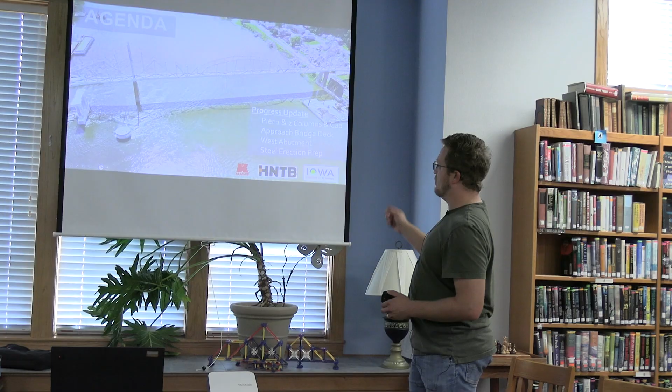Thanks, Derva. Got another great crowd here tonight, lots of familiar faces. If you're not familiar with me, I am Clayton Burke, the Iowa DOT project manager for the bridge replacement project here in Lansing. Once a month we get together and do these bridge talks, so I'm going to give you a little update on some of the construction that's been happening on the new bridge. We've been working on Pier 1 and 2, the approach bridge deck, the west abutment, and we're also getting ready to start setting steel for the new truss, which is a very exciting milestone for us.

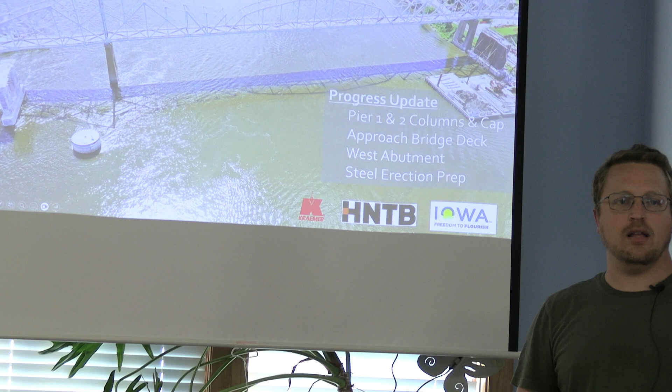And then we've got a special surprise afterwards. Is that all set up, Travis? We'll have a special surprise later. Is that all? I don't see it. I don't see it either. Maybe. Otherwise, Travis has something really cool to show you up on the wall.

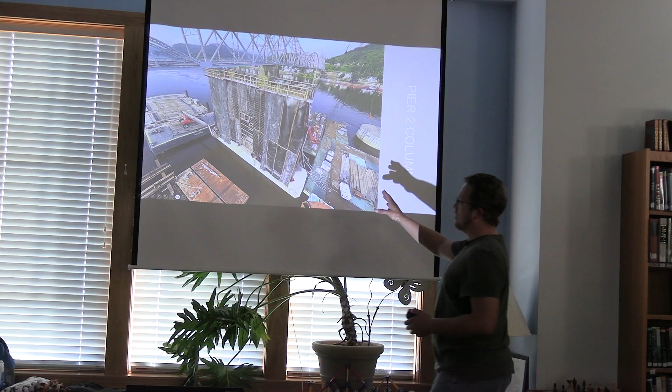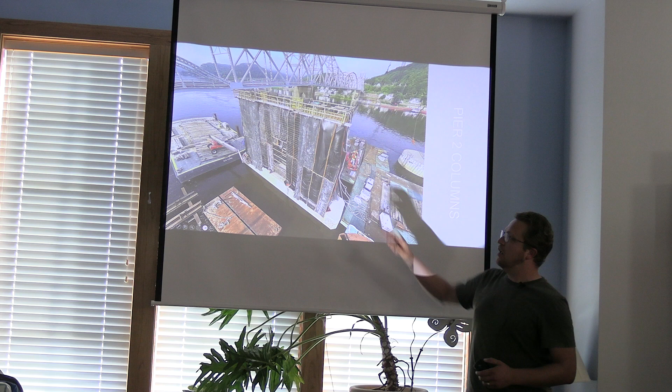Diving into it, we've been working on Pier 2 out in the middle of the river for quite a while now, and I believe the last time we talked we had poured the lower portion of the pier columns, what we call the saddle. Now we've been working on the middle of the columns and the cap of the pier. Here you can see all of the formwork, the thermal blankets that cover the formwork, and the cooling tubes, because this is mass concrete, so we care a lot about the temperature inside the concrete compared to the outside. We don't want the inside to get too much hotter than the outside, and that's why we pump cool water through the concrete on the inside to cool that core, and then we put thermal blankets on the outside to heat up the outside. That's all to keep the concrete the same temperature as it cures, which prevents cracking primarily.

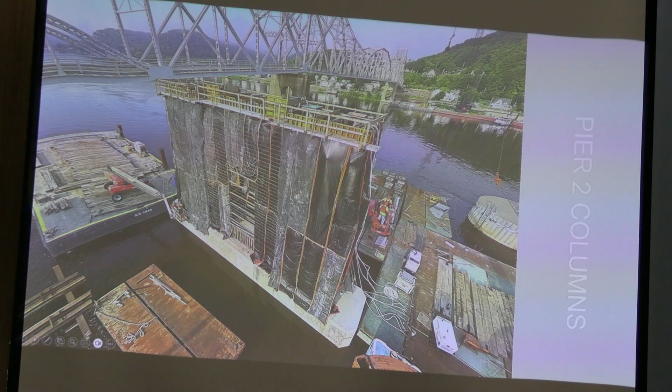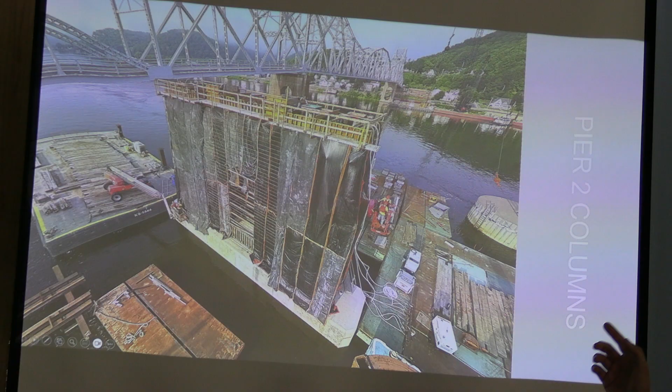So we've got the blankets, the cooling tubes, and then eventually the contractor pours the pier. They pour the concrete in there, I believe it was around 530 cubic yards of concrete. To get it out to the middle of the river, they have to use 2 concrete pumps, which is pretty unusual. They dump the concrete into one pump, that pump pushes it all the way through the hose into another pump, and then that one finally pushes it out into the middle of the river.

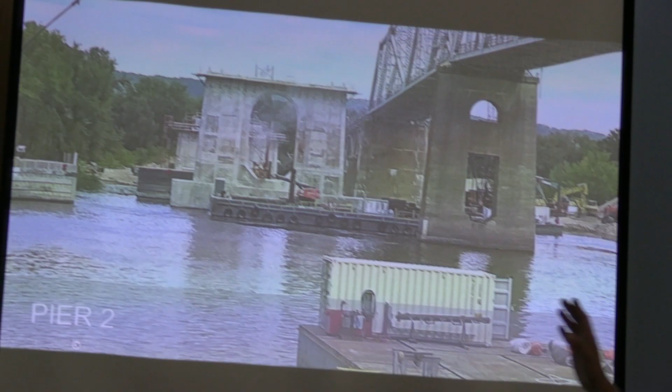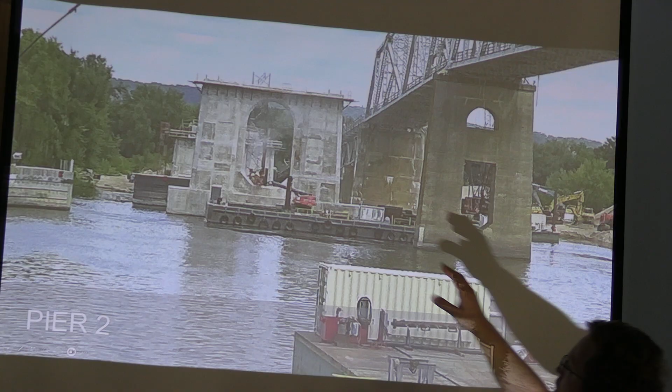And then they take all the forms off after it cures, once the temperature has gotten close enough to the outside temperature that we're not concerned with cracking. This is what it looks like - this is now the completed Pier 2 out in the middle of the river. You can see the patchwork from the forms, which will age with time, and we may clean some of that up to get a more uniform look. But this is ultimately what it looks like for those large concrete structures - after you take those metal forms off, you have a nice finished product like this.

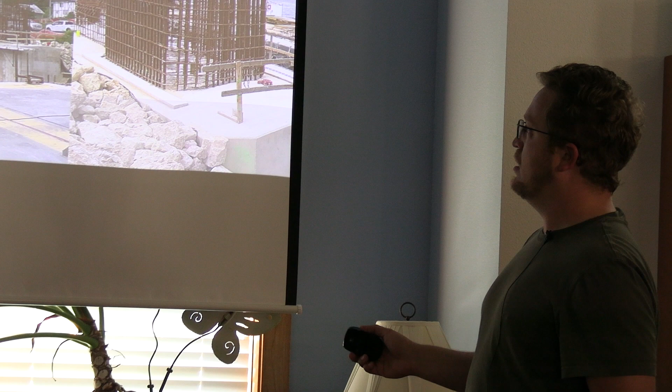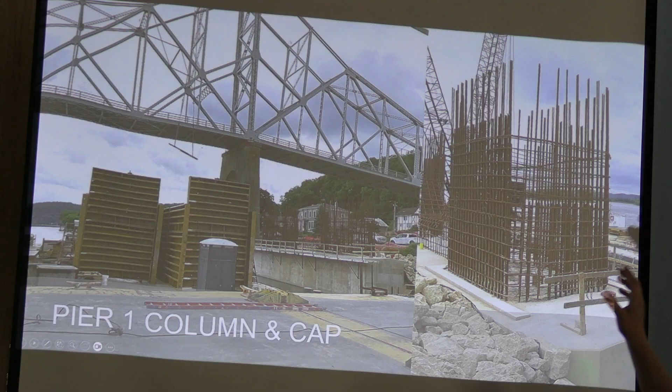And then on Pier 1, we are working on essentially an identical pier, using the same formwork. After they finished taking the forms off of Pier 2, they were able to start using those forms on Pier 1. To start with, you have the rebar that reinforces the concrete, the columns, the saddle, the cap. This rebar is protruding out of the footing, so it looks like it connects to the concrete. It's actually sticking down into that footing, creating a strong bond between the footing and the columns of that pier, and then it swoops off down into the saddle, making that nice open window in the middle of the pier.

Then the contractor will bring in those steel forms again and set them up around the rebar. So after we finished the saddle and the lower columns, we again put the steel forms up for the column and the pier cap. This is Pier 1 right on the Iowa bank. It's very tall and very close to Front Street.

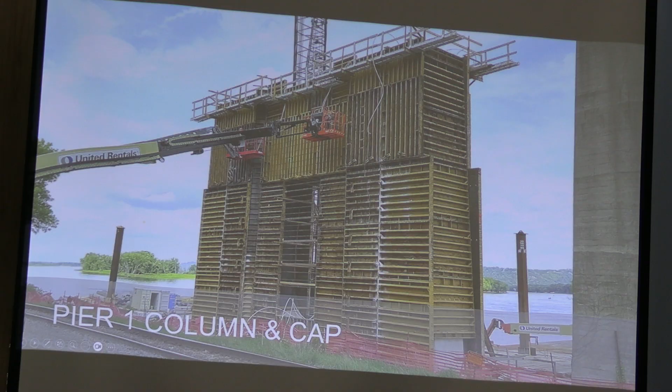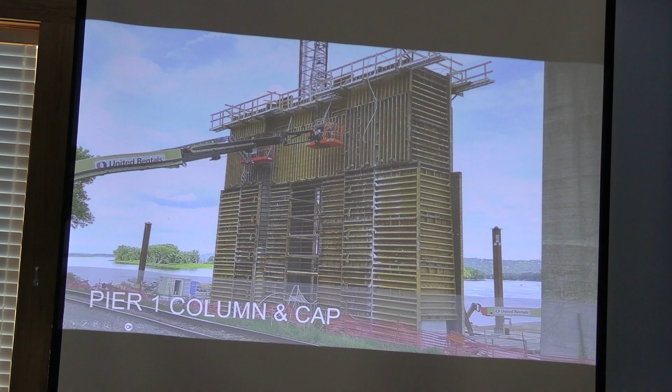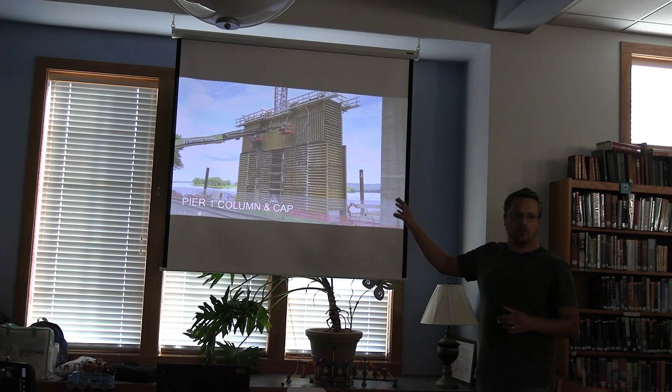You're also working over the railroad here, so everything has to be done with lifts extending over the roadway. It adds an extra layer of challenge to the process because you have to move if a train's coming. So they constantly have to get up there, get some work done, move out of the way for a train, get back, get some work done. There is a railroad employee called a railroad flagger that works with us on site, and that flagger keeps track of all the trains and all of the employees and people working in the work zone, alerting everybody when a train is coming. They get about a 15-minute warning, and they've got to get out of the way and be ready for that train to come through.

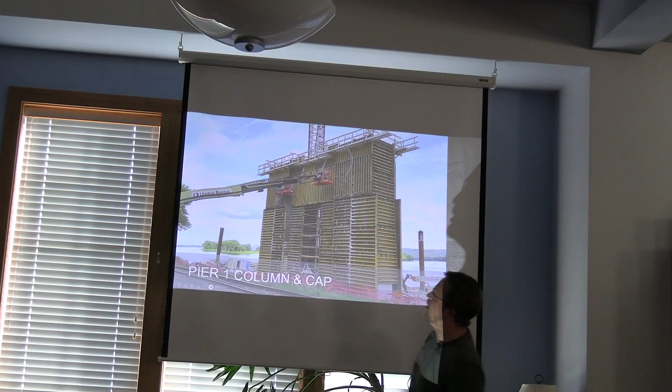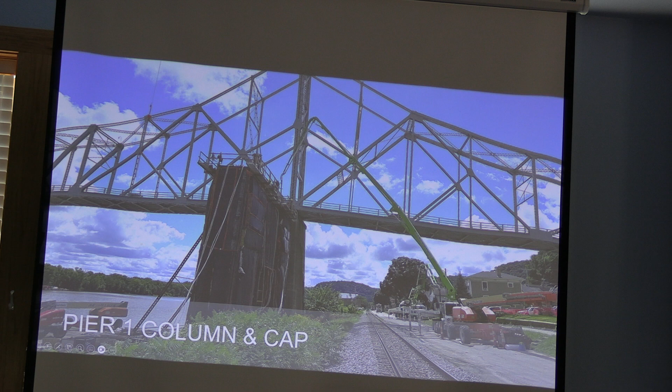Here again, it's mass concrete because it's very thick, wide, and tall. There's the cooling tubes getting ready, and then we're going to pour this with another set of 2 pump trucks. This time it's not out on the water a long distance, but we have to pump the concrete underneath the bridge and then up over into the pier forms. Again, the train element complicates it. This was another 530 cubic yard pour, which takes most of the day, so naturally you'll have several trains come through while you're pouring concrete. You just have to stop, swing out of the way, wait for the train to come through, and then go back to what you were doing.

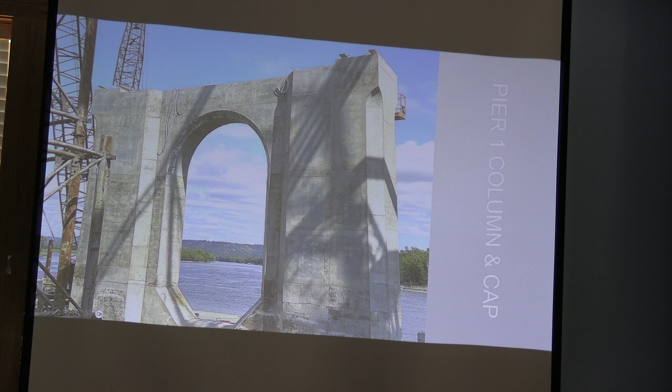After it cures and the temperature is all good, this is what it looks like with the forms taken off. So now we've got the west abutment complete, Pier 1 complete, Pier 2, and the remaining piers on the Wisconsin side. It's kind of a big milestone to have all the substructure concrete poured. We're very excited about that and getting to move on to the structural steel.

Last time we were starting to touch on the Wisconsin bridge approach and the concrete deck we poured on it. If you've driven over the bridge recently, you can see that nice big deck spanning along the side of the existing bridge. This is providing a 40-foot wide roadway between the barriers, compared to the 21-foot wide roadway on the existing bridge. So the new roadway will be much wider, with full 12-foot lanes and 8-foot shoulders on each side - quite a bit more space for users, commercial vehicles, and everybody to get through that bridge.

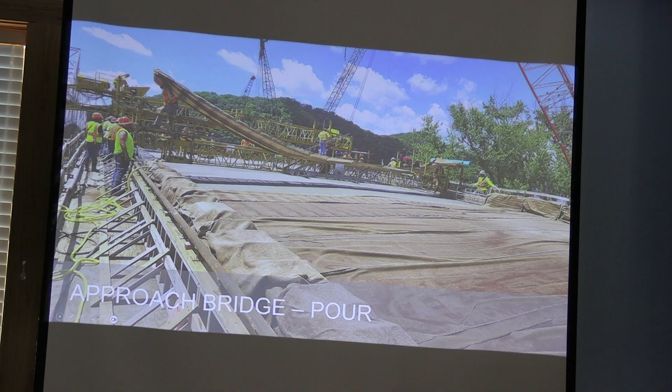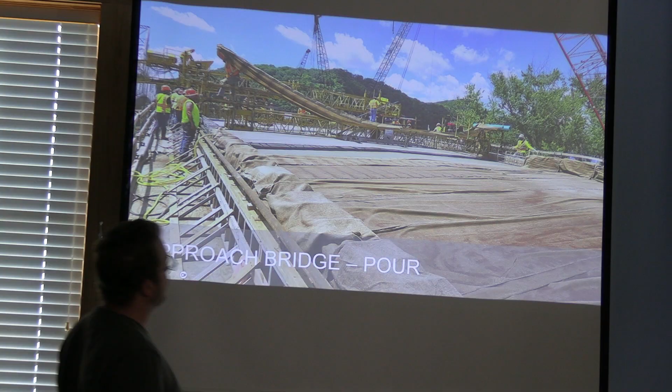Here's an interesting point. All of these yellow trusses, or this yellow steel frame you see, that's all part of the paver, what we call the paver, or the brand name is a Bidwell, and a lot of people like to call it by that brand name. This Bidwell has a track on it, and then a device underneath that track that goes back and forth, and that track follows the crown of the roadway.

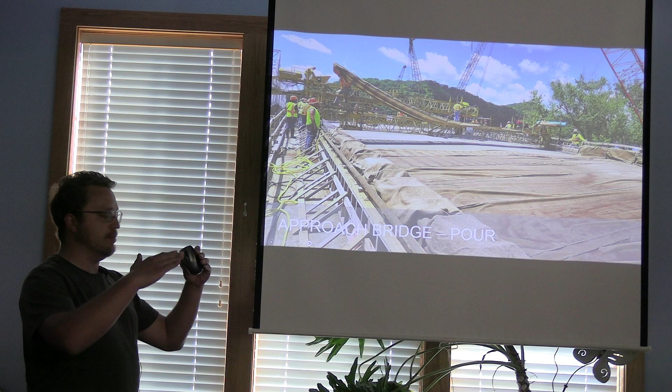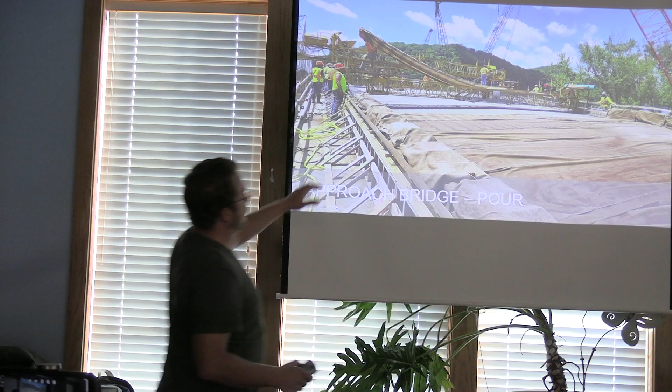The roadway isn't perfectly flat - we have what we call a crown in it, with slope on each side of the middle of the road, which lets water drain away from the center. So this paver is actually set up with that crown in the middle, and it goes back and forth. You have people working in front of it who move the concrete into the right place and shovel it so the augers spread the concrete out just right. Behind it, you get a nice smooth surface, but we don't want it too smooth - we want a surface that's a little rough for friction so your car tire grips it well. And that's why you'll have...

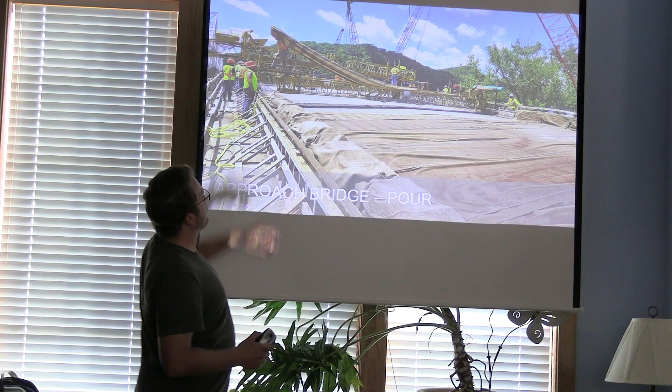I don't think you can see it in this picture, but you'll have somebody with just what we call a broom, which is just a broom, and you run it across and pull it back, and it creates that nice texture on the surface of the concrete so that your cars will have a nice grip and you won't be slipping around on a wet, slippery bridge.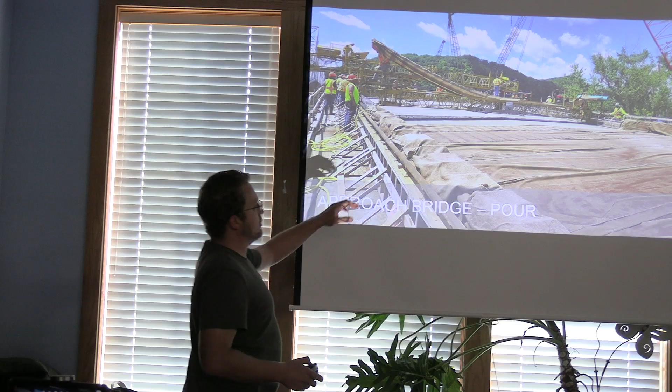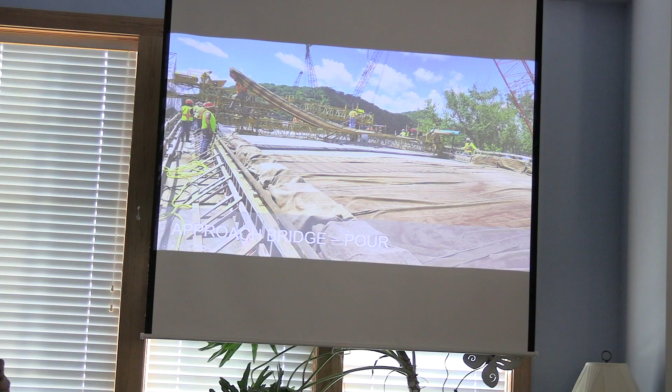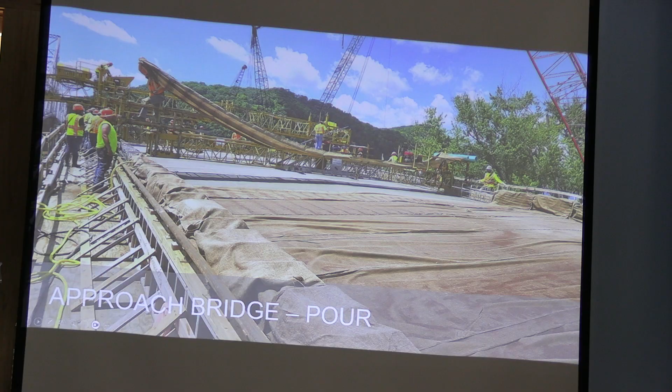The next step is to put this brown stuff down, it's burlap, long sheets of it. We get them wet before the concrete is placed, and then we put down the wet burlap on top of the concrete as close to the paver as we can to make sure that concrete stays wet as it cures. A very important aspect of concrete is the water to cement ratio, and when the surface faces the sun, air and wind, the water will dry out from the surface, which can create shrinkage cracks or other defects we don't want. So we want to keep that surface wet so it has enough water to hydrate and stay nice and strong.

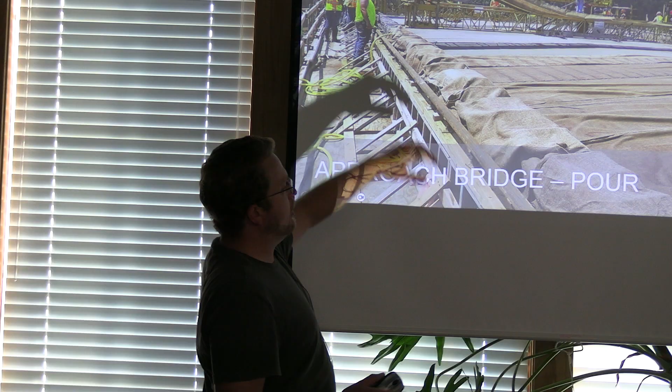Then you put burlap on the entire bridge, and set up a system of sprinklers. That's how important the wet cure is, to have water on the surface of the concrete for 7 days after you pour it. They'll keep those sprinklers running. They have pumps down in the river that pump the water all the way up here, and then run it all the way along the length of the bridge deck.

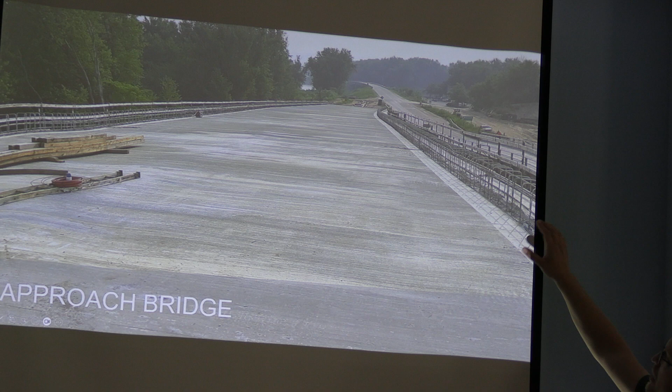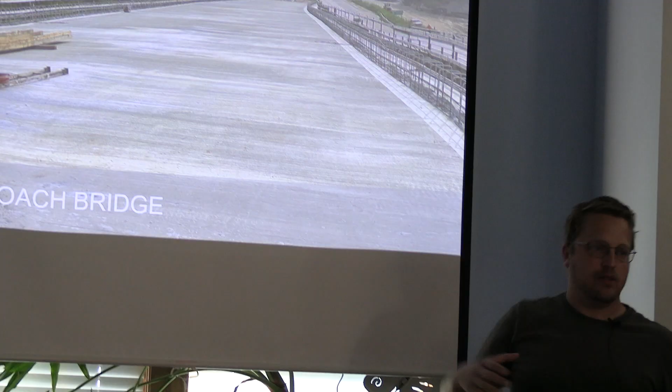After the 7 days, once the burlap has dried out, the contractor will pull it off, and then you have the bridge deck. Here you can see that texture I was talking about, nice and rough across the deck. Then there's a section on the very edge they don't broom, so the water will run off and hit the smooth spot and go down to these drains in the bridge deck. This is an entire system designed to get the water off quickly and efficiently so that you don't hydroplane or have any issues with icing.

Moving on to the west abutment, this is the location where the new bridge will touch down on the Iowa side. Here you can see 2nd Street is just behind this.

We've talked about the retaining wall before, so this is what we call a mechanically stabilized earth wall. It's just a bunch of concrete panels that have metal straps that go back, and then we fill the back with sand, and as we fill it up, we put the straps out and bury those straps with sand, and that holds those panels in place. That's where a lot of the strength comes from.

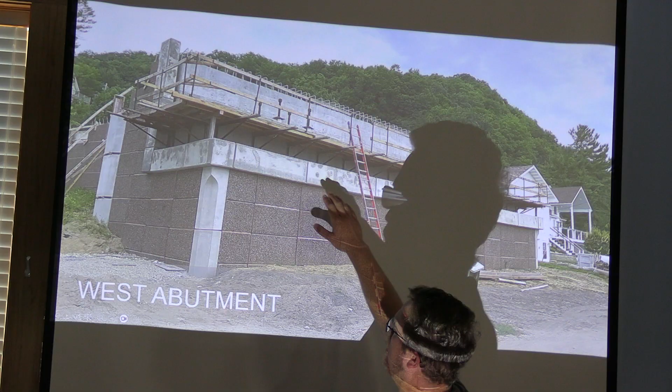So we've built this up. We poured coping on the top, and that just covers the top and bonds the top of the wall together - concrete poured in place. We have the abutment concrete here behind this framework, and that is all complete. In this picture, we still have the top to pour.

It's kind of a unique feature of this bridge. When the steel is put together, there's going to be a point in time where the truss will sit out over Pier 1 and hang out over the river. And when it's hanging out over the river, it's going to want to teeter-totter over Pier 1. So these tie-downs are actually going to hold the steel truss down rather than push up on it - it'll be lifting up on this side and hanging out over the river.

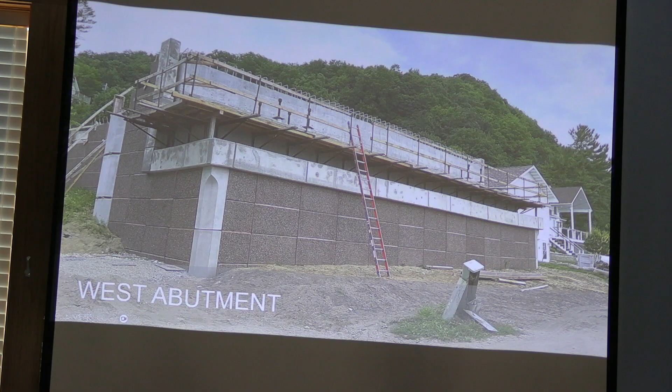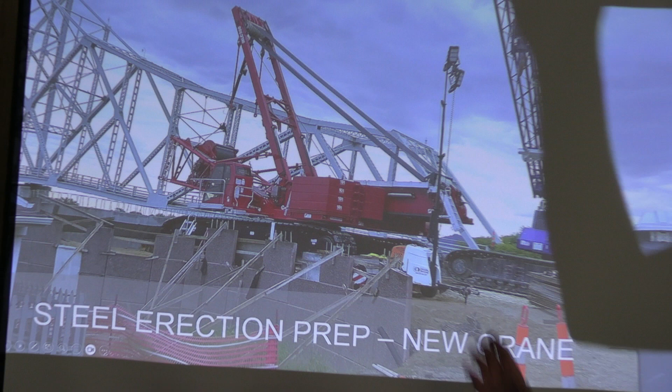We're at an exciting point, getting ready to start setting steel. If you've been along 2nd Street recently, we've had this blue crane sitting there supporting construction of the abutment, and also helping put together a brand new 300-ton crane that Kramer just bought. Quite the excitement the last couple nights out on 2nd Street. We had to close Iowa 26 and the Iowa 9 crossing to have enough room. This comes in quite a few truckloads. The crane doesn't just drive up on a trailer and get delivered - the tracks come in one load, the body comes in a load, the different components come in different loads, the weights, and so on.

That's 17 trucks total to get that out there, including the boom. And then you need another crane to put it together - so there's the crane that builds the bridge. Theoretically that crane is self-assembling, but it's just easier to have another crane.

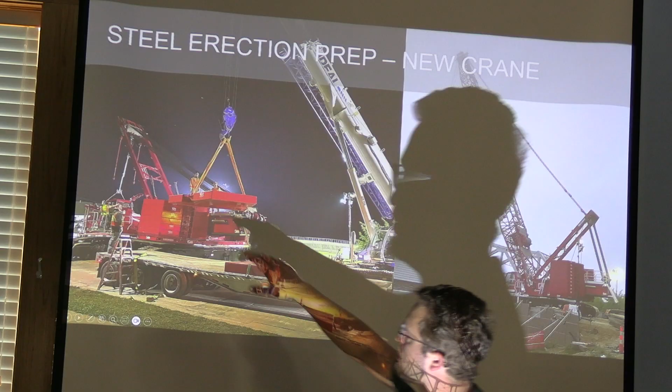If you've driven by today, here's the assembly at night. Right here you can see them lifting a counterweight onto the back of the crane. The second night we brought in the boom - 265 foot, I think is what they're running. Quite a tall boom, massive crane, something you don't get to see on every bridge project. We're pretty excited to have this here in town, and that will get us ready to start setting steel beams off of this abutment.

And to do that, we have to construct what we call shoring towers. Keep back up a second.

So this crane is what they call a VPC crane, variable position counterweight. In that right-hand photo, that big stack of counterweights, there's actually a tray that slides on. As you start picking up a heavier load, that counterweight will slide back - there's hydraulic systems that push that counterweight back to counter the load being picked up. So this is a very sophisticated piece of equipment for heavy picks. Did Kramer tell us how much that cost? No, undisclosed, but it's probably somewhere between 2.5 to 3 million, depending on what sort of doodads are all on there. Technical term, huh? The doodads.

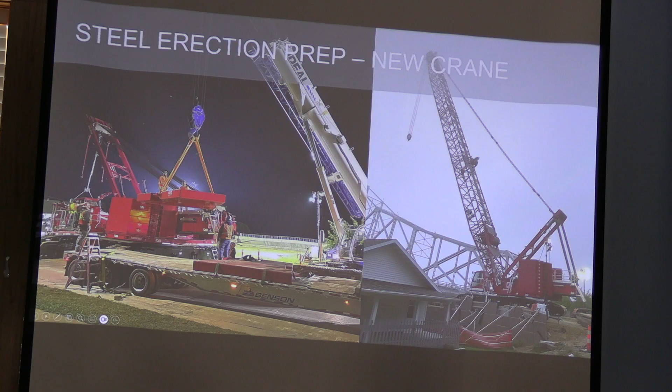Thanks, Travis - very interesting crane. And then we'll get to setting steel. So to set that steel, because we don't have 400 foot pieces of steel, we have little 50, 60 foot pieces that go together, we have to set them on top of shoring towers. Those are just temporary steel towers that will support the bridge while it's built. Once the bridge can sustain its own weight, when all the different pieces of the truss are put together, those shoring towers get taken away and it holds itself up.

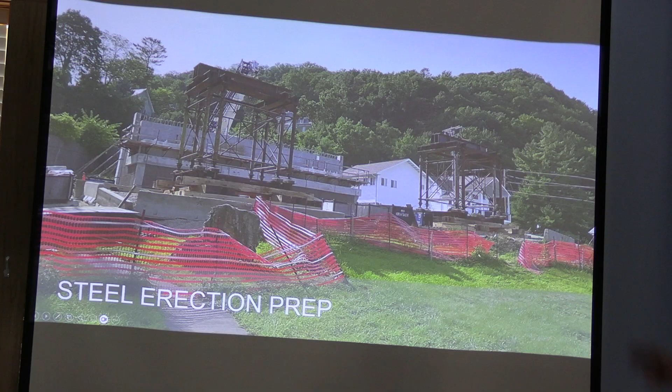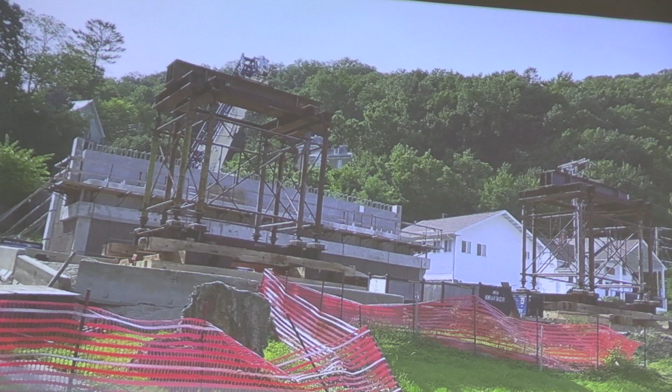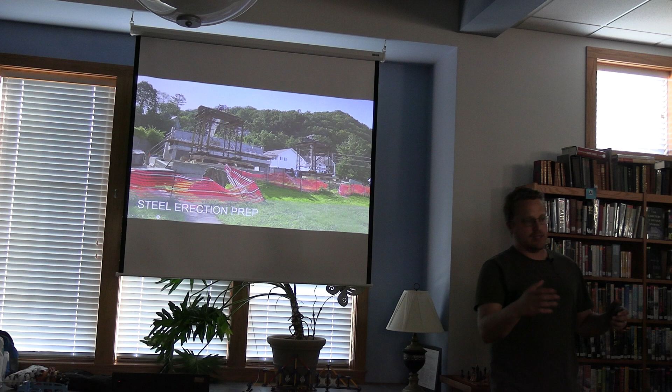An interesting point about these - you have tiny little boxes on the bottom that everything sits on, and we call those sand jacks. What they allow us to do is set this tower to a very specific elevation. They'll set the steel on top of it, and then to get that tower back out with the steel on top, you have to relieve that weight and height of the tower. They'll open up little ports on these sand jacks that have bolts filling them - you take the bolts out and blow air or water into those ports, the sand comes out one side, and the tower slowly lowers. That's how the contractor will get these towers back out after the steel's put on top.

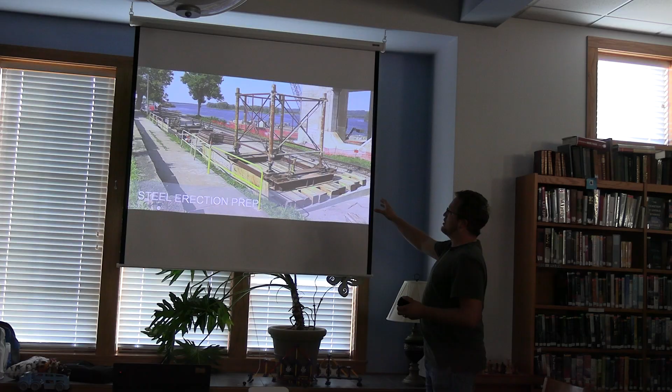And yep, here's what Front Street looks like after the concrete pad is poured, and you have the crane mats underneath. So they're getting these done.

Unfortunately, Front Street will be blocked off for quite some time while we build the new bridge, as well as take the existing bridge down. But after they're done, they'll take these pads back out, clean everything up, and restore Front Street to the original condition it was in. So if there's any damage, we'll fix that.

And then you'll have a nice new bridge over it. And then, kind of an interesting part of this, typically the railroad doesn't let you very close, but we were able to get approval to build these shoring towers just right next to the tracks. So those trains come in and they're very close to those shoring towers.

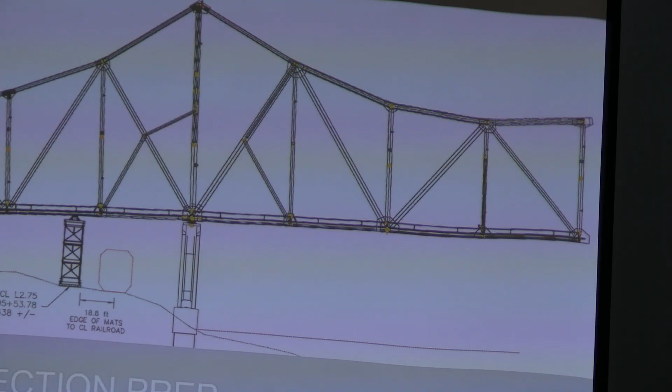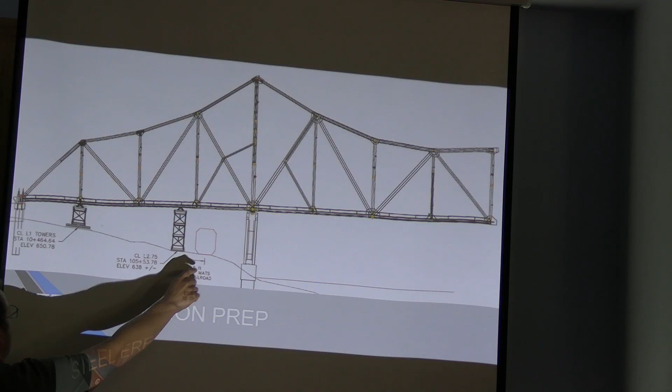So to look at what the setting of the steel will look like, we've got a diagram here that shows these are the shoring towers we were just looking at. This red box is the train. This is the train track and train that comes through. This is Pier 1 on the Iowa side of the river.

And then what we're going to do is remember these sections of steel come in pieces. They don't just go from the abutment to the pier. So we're going to start by setting the steel from the abutment to this first shoring tower.

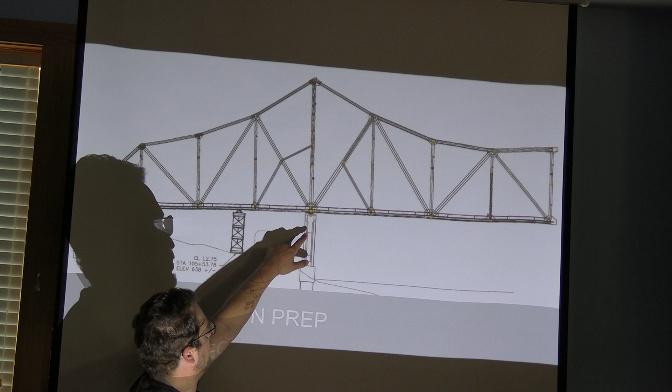And then we'll get that stabilized with the rest of the pieces of steel that make up the truss at that point. And then we'll just keep working our way out to the next set of shoring towers, connect everything, stabilize it, and then reach from this shoring tower out to Pier 1. And at that point, you won't have any of this part. You'll just have this vertical piece to the west, and that'll be the first section of the truss.

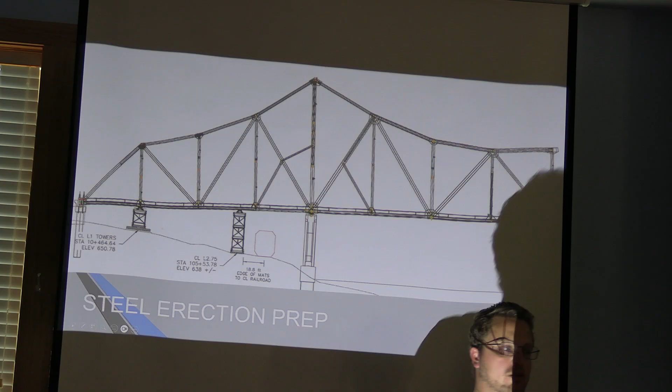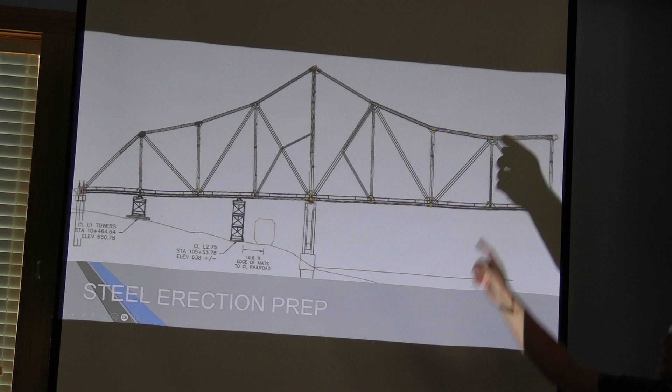And then after they have that built, you can start building what we call a cantilever, and that just means it's a structure that hangs out without any support. So this is entirely supported by this first section of the truss. If you imagine that weight hanging out there, this truss is pulling up on that weight and holding it in place. And that's why the weight over here is going to pull up on this abutment, and that's why those tie downs are so important.

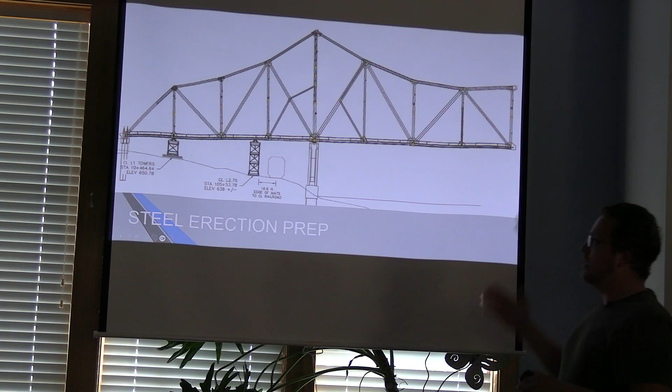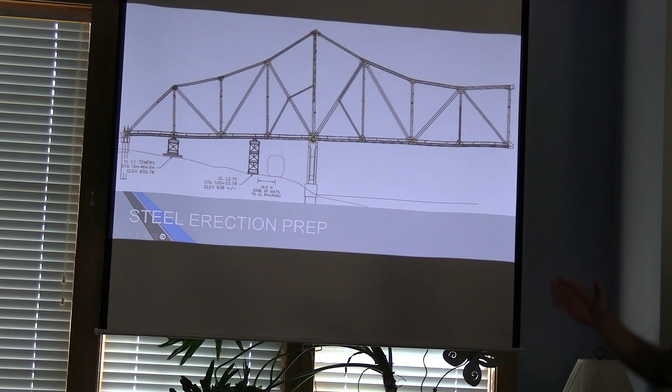So they'll come off of Pier 1 and build out over the river, and then we will essentially move to the Wisconsin side after that, build the Wisconsin side, and then the very final piece, we're building the center of the truss either next to the marina or next to the existing bridge. We're not entirely sure yet. We're talking about different options, but they'll build the center section on a barge and actually float that barge over here into place.

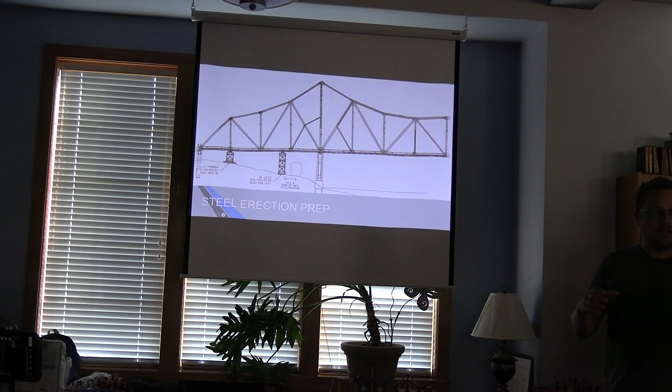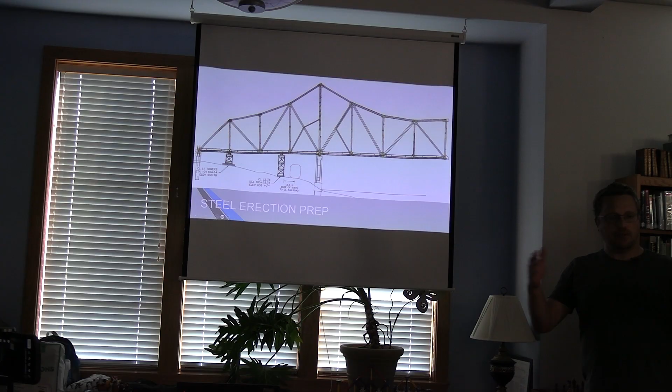And then they'll lift that center section up with what we call strand jacks, which are just cables with these massive jacks that very slowly pull the cables up, and they'll lift that entire section into place, bolt it in, and then it'll be set. There's a few other steps after that for establishing continuity and different components, but primarily you put that in place and then you have your continuous truss.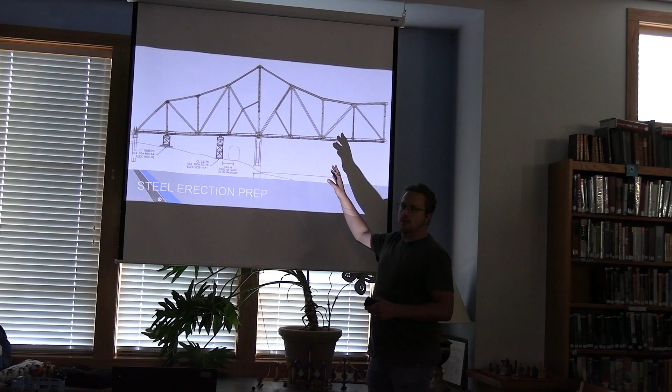What's the time frame to get to Pier 1? Is it December? Okay. And then did they say anything about the rest of the truss? Usually by end of January, right? Yeah. So coming into the middle-end of winter, we should have the rest of this in place.

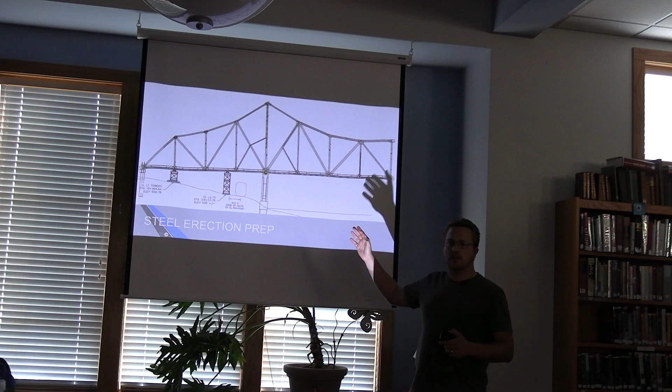And in spring, they're moving over to the Wisconsin side. February-ish. Is that about a third the length of the whole bridge? It'd be a little bit more. The center section's very short compared to the rest of it, right? Well, there's 25 bays. Yeah, so we've got 8 bays here. And the bays in the main span are slightly larger than the bays in the back span. So we've got about a third.

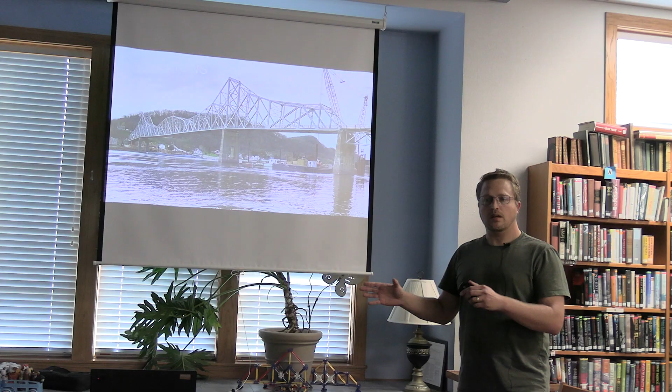Any questions on the progress we're making so far? Are the curbs on the Wisconsin side poured? The curb, the floor, the approach is poured. Oh no, so we just have the bridge deck down. We don't have the concrete barrier rail that will go next to the deck yet. That'll be coming in probably this fall. It's not a priority item right now, but it does need to get done at some point before the rest of the bridge is built.

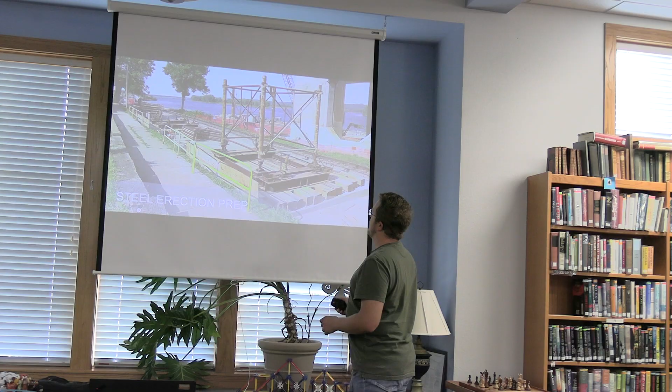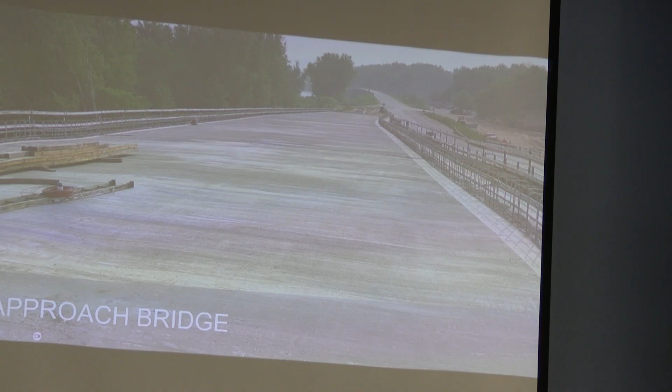So, kind of an interesting point on that. The concrete barrier will be a little different on the new bridge. Typically we just have a tall concrete barrier, and that's it - just the concrete, and that's the barrier. In this case, we have a shorter concrete barrier, so what we call a 2-foot parapet. It's just 2 foot tall, and then we're putting a steel railing on top of it. So that'll make it more open, and you can see more out of the side of the bridge. I think it'll look pretty nice compared to just some plain concrete out there.

Is it pedestrian friendly? Yes, it does meet the requirements for pedestrian traffic and bicyclists. So it is technically just a shoulder. Will there be a line? There'll be an edge line painted on the roadway. Yep, so a lot safer than riding your bike down the middle of the existing bridge. Have you ever? I haven't. I don't know if I could.

Yeah, in the back, sir. That pause that you're doing when you're pouring the concrete on the island side due to the train, does that affect the integrity of the concrete since it's not continuous pour? If they can pour it at a fast enough rate, that pause is, what do you say Travis, 10, 15 minutes at most. As long as they can get right back into the top of the formwork and they can place that concrete in the right pattern, so they're not putting it all on one side and then letting that get hard, we won't have any cold joints or any integrity issues with the concrete. If it was longer, like a 45-minute pause, then we'd have more problems. But we are able to keep it down to a smaller window.

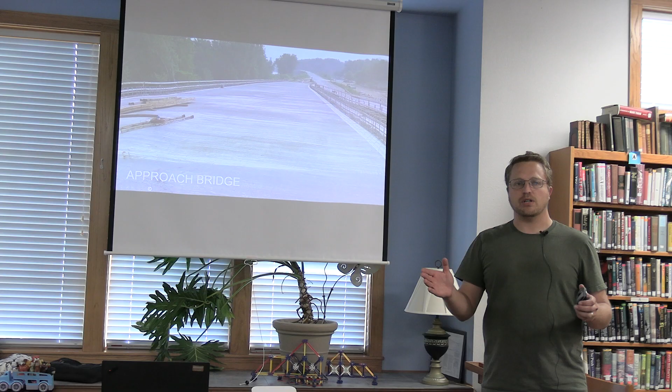Is it another month or 6 weeks before the internal and exterior temperature are the same? That's kind of a deep subject we could get into on the curing time of concrete, and typically it takes 28 days to get to 95% strength, but concrete is almost continually curing - like, is the Hoover Dam still technically curing? Yeah, it's still technically curing, and that's because it's so massive. But there would be a certain time period where it takes for the outside to reach the inside temperature and match the ambient temperature.

Yeah, Bruce. I wondered a little bit about how in the world - how do you operate a budget for a project like this? Because I'm thinking, okay, so you pick a number, but from what we've learned here, there's always things that crop up.

And so what? So you have a budget. What is it now? Like it's around 140 million, but it does - the cost just increases based on things that weren't anticipated. Right. But where do you get that money from?

So you're asking the tough questions, Bruce. It's very complicated, but the simple version is during the development process, we come up with a figure we call the engineer's estimate. The engineer will come up with quantities and prices for those quantities - so many cubic yards of concrete, based on other projects, that concrete costs about $1,100 per cubic yard. They use that to come up with a total estimate for the project.

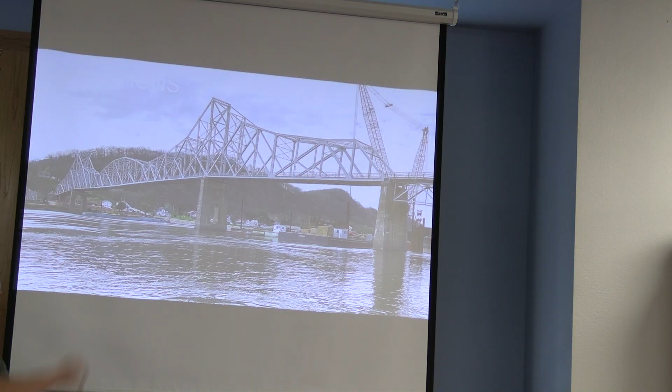They'll be taking the truss down starting at the western part of the center span and going towards the Wisconsin side. They'll take that entire section down with explosives, and a lot of engineering goes into that demolition plan. If you've ever seen an implosion of a bridge structure, it's designed to go straight down. There are examples of that going wrong on the internet, but the intent is always that the structure falls straight down into the river.

The truss on the Iowa side will be taken apart in panels. They'll have cranes on barges and carefully remove it piece by piece because you're extending over a railroad and a roadway, and you have houses nearby, so you can't use explosives on that part of the bridge.

Will the public be informed when they're blowing that up? Oh yeah, everybody will know. Before or after? Definitely during. But no, good question, Bruce.

What happens to the piers then, the old piers? Those will probably stay in place for a little bit. They want to get back to driving those pilings as fast as they can because that's on the critical path. Eventually they'll take equipment and break the concrete down. They may use some explosives to blow the concrete up, but I think a lot of it will just be hammering the concrete and blowing some of it up, taking the pieces out. And they'll take the dolphins too, so the dolphins come out at the end of the project.

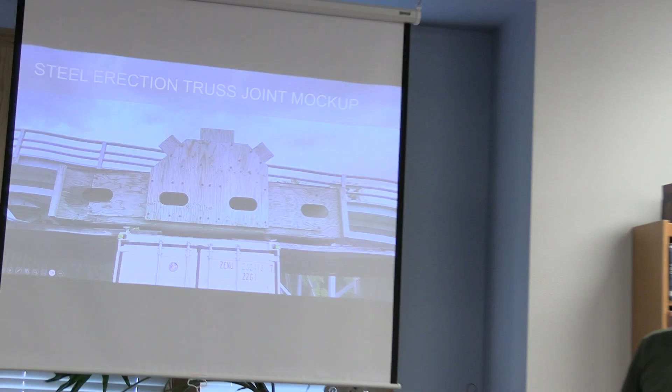We were going to bring in this massive wooden joint that Kramer built to show how tight these access holes were, built to scale from one of the joints on the new bridge. To put these bolts together, somebody has to climb up into those holes to tighten them. I managed to fit through one, but it was tight. There was a change order to make a larger man-size hole, for somebody wearing a life vest. But maybe we'll get that here another day.

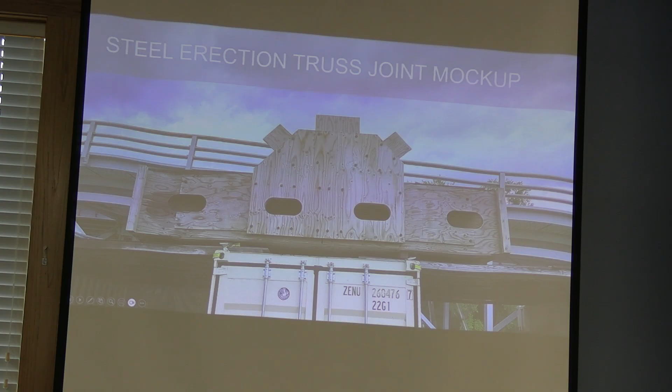Travis has something really cool up on the wall next month. So if you back up a couple clicks to where we have that cantilever picture.

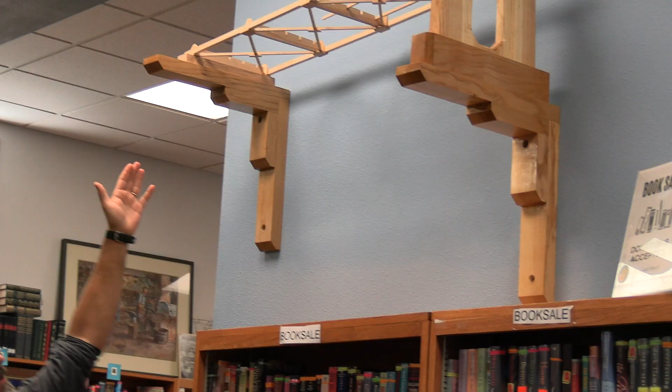If you can take that picture and superimpose it up here, you'll see we've got our west abutment and Pier 1. So here's your L0, or L1, this is where your first shoring tower is sitting in the alley. The second shoring tower is at 2.75, just before L3, sitting on 2nd Street. The railroad and the pier go in between here.

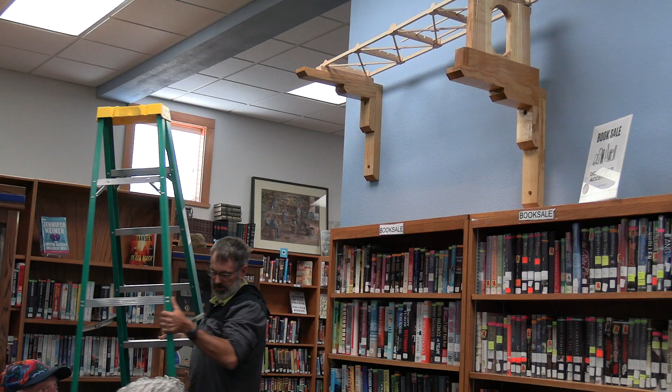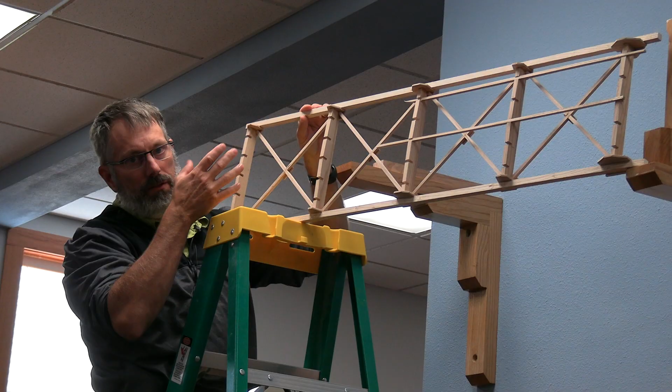This isn't quite all of the floor system yet, as I still need to put the stringers and stringer bracing in. This is the first 4 bays with the floor beams, all the gussets, all the lateral bracing, and there'll be 5 lines of stringers that go in here to be put together. Then I'll start putting on the upper chord and then the verticals and diagonals to fill out the truss.

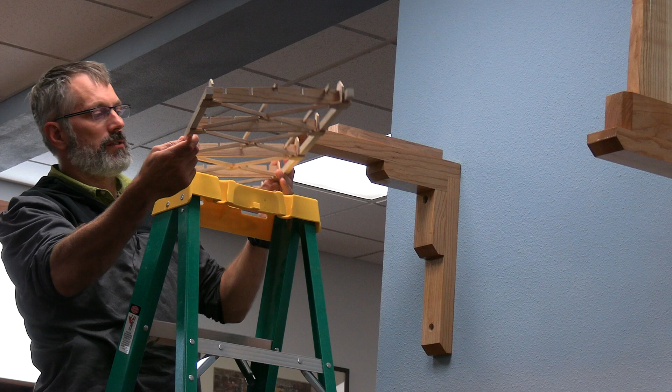We'll be switching over to walnut wood for the compression members to help illustrate what this looks like under dead load. This is really small and finicky to make these little strips to put it together, but I'll set it down here on the table so you can take a look. You'll see these same exact pieces show up out here on the job site and be erected. The erection will be a little different than this, obviously with the shoring towers and being built sequentially, but this should give a really good idea of what this thing is going to look like. Of course, I did not make the actual section shapes, these are just rectangular, but this is the first 4 of 25 bays, to give you an idea.

And this is all to scale. One inch equals 5 feet. So there's about 10 inches in between each one of these.

Cool. All right, well, that's all we got for you this month. I appreciate you all coming out, and we'll be back at it next month.